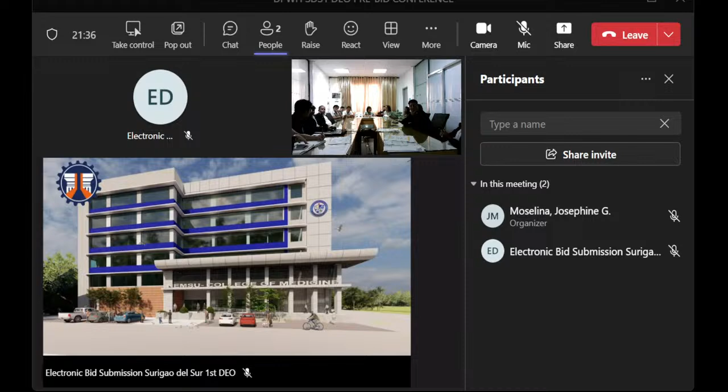Good morning, everyone, our BAC TWG, most especially to our representatives from the recipient of our first project presentation of the bid, our representatives from NEMSU, PMU. So today I'll be presenting our project entitled Construction of Northeastern Mindanao State University NEMSU Medical School, Tandag, Surigao del Sur, with a contract ID 24NH0097. So this is still our pre-bid conference.

So our source of fund for this project is under our General Appropriations Act of 2024, amounting up to 100 million. Project location with the following coordinates, and the scope of works for this project is construction of reinforced concrete pile foundation, tie beams, columns, floor beams, both conventional and post-tension, reinforced concrete slab and stairs up to our second floor, and plumbing works roughing installation, as well as our electrical works roughing installation.

So again, our appropriation is 100 million, but our ABC is 96,500,000, and our location is in Tandag, Surigao del Sur, within the vicinity of our school, Northeastern Mindanao State University in Rosario. Duration of this project is estimated to be about 360 calendar days, with the following description of works to be done with their percentages based on our program of works.

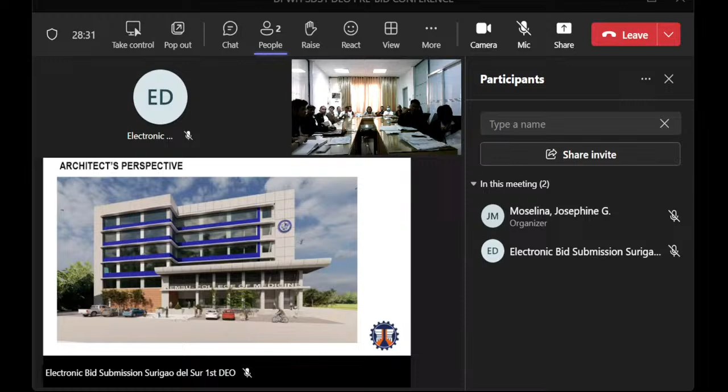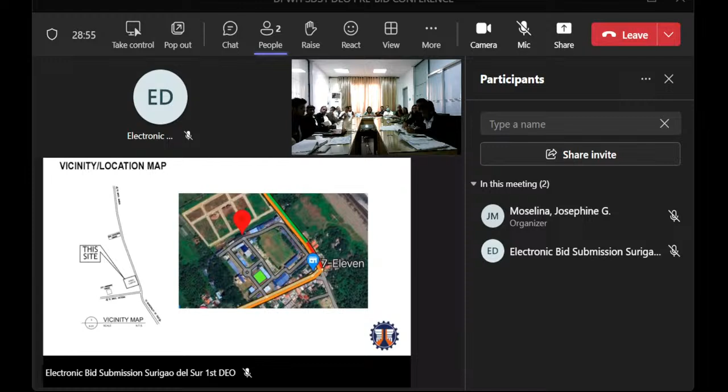For the vicinity or location map, it's located within the vicinity of our Northeastern Mindanao State University main campus in Rosario. As you can see, the green rectangle is the site. It is located adjacent to our administrative building, in front of the administrative building. So that's gate 3? Within gate 3, so near our gate 3 entrance.

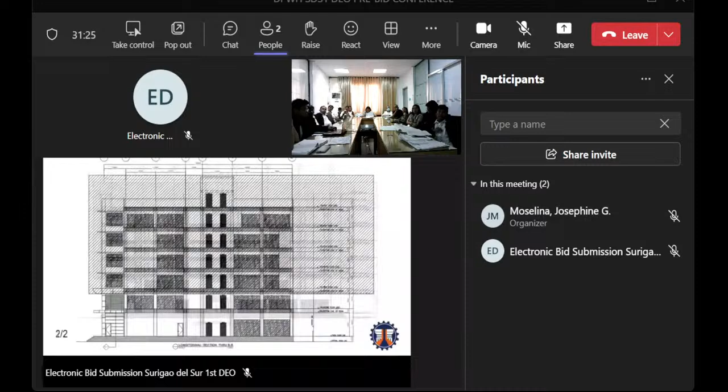So this is for our rear elevation. For our right side elevation. Then for our left side elevation. Our cross section through section A. Cross section through B.

The following details for our architectural plan for our stairs.

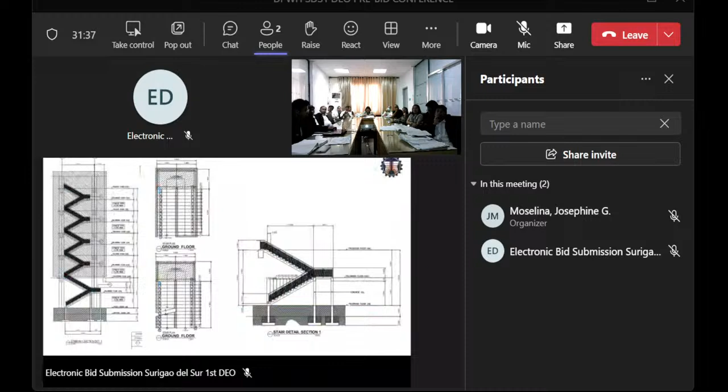And then let's now move on to our structural plan. Just to have an overview of our structural framing for this project, this is the STAAD model of our projected structural plan for our NEMSU Medical School.

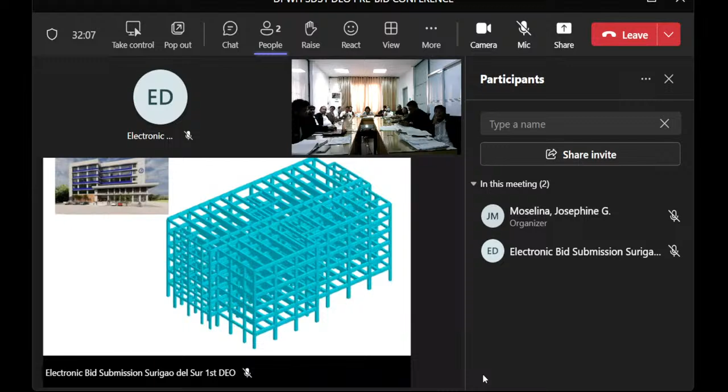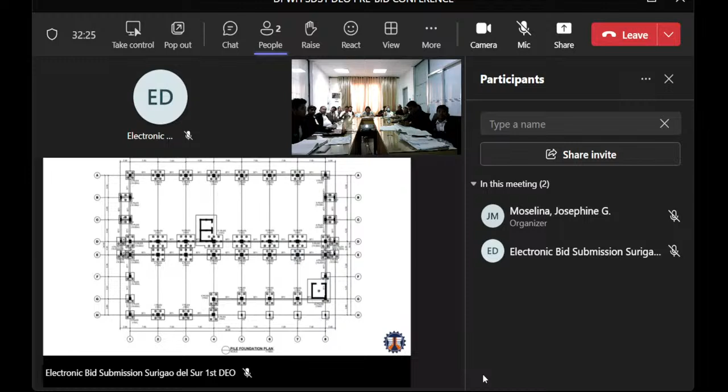For our pile foundation plan as shown, the following foundations have their breakdown on scheduling. We have 10 different types of foundation. Only one of those foundations does not involve pile driving, it's not load bearing, and the other foundations have their equivalent driven piles.

Just to have an overview of the pile length for this project, there are 2 types of piles, 15 meters and 10.5 meters. The pile cap details are also indicated in our plan.

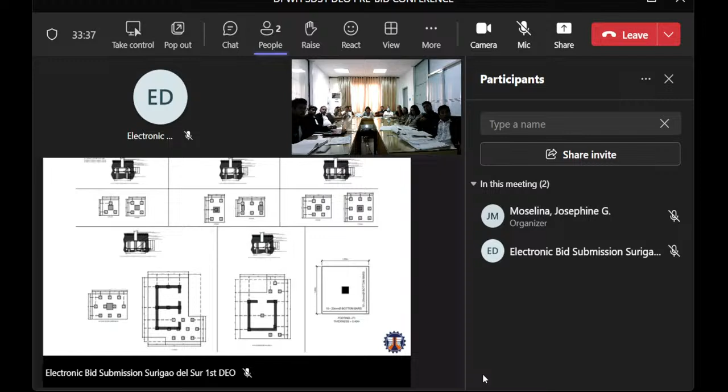We have a relatively large foundation, that is for our elevator shaft foundation. So you may refer also to the schedule of the plan.

Column schedules are also indicated in the plan, as well as our stair foundation details, stair details, and our reinforced concrete detailing for our elevator shaft.

And this is our second floor framing plan. Let me just highlight why our project has two types of beam, we have conventional and post-tension beams.

So these beams that are covered in our long span are considered to be post-tension or pre-stressed beams, as per our design, and the rest of the beams are conventional. Basically, the longer beams are long span, and NEMSU is aware of this design because in case of versatility with regards to the floor plan, as per our consultant, it can easily be revised.

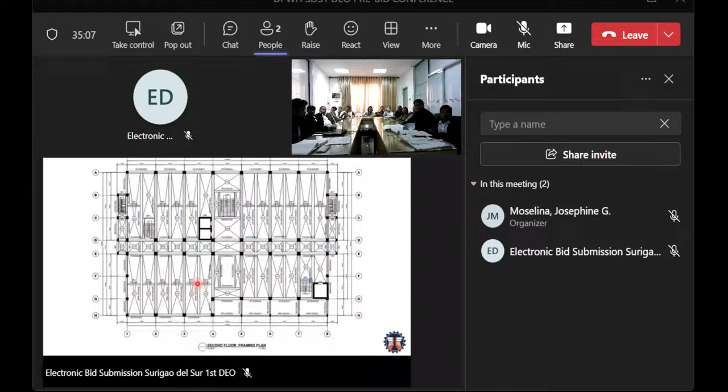We have the schedule for our conventional beams, and the same for our schedule for our post-tension beams with the following post-tensioning details. We're using 12 strands post-tensioning for our post-tension beams. The following slab details are presented as well, and for our slab we have incorporated our steel decking forms.

As shown in our typical details for steel, our design has also provided the detailing for our two-way slab.

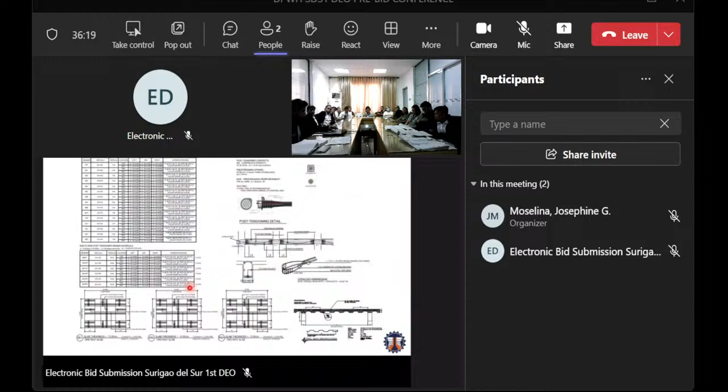That is all for our structural detailing. Moving on to our plumbing plans.

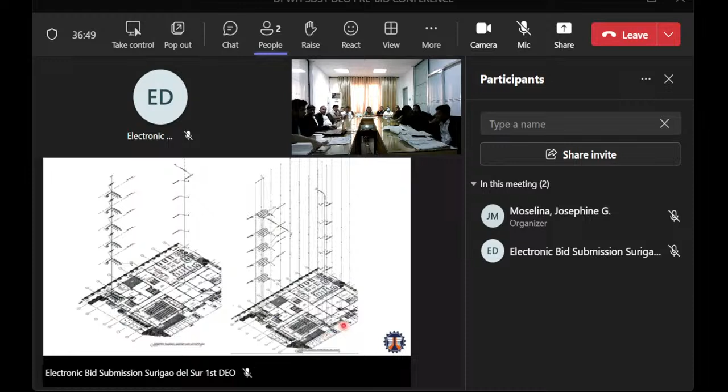This is the projected isometric view of our plumbing layout, for our sanitary line and for our storm drain line as well, mostly on the side of our comfort rooms. Same for our water lines, for our comfort rooms, faculty rooms, and as well as our laboratories.

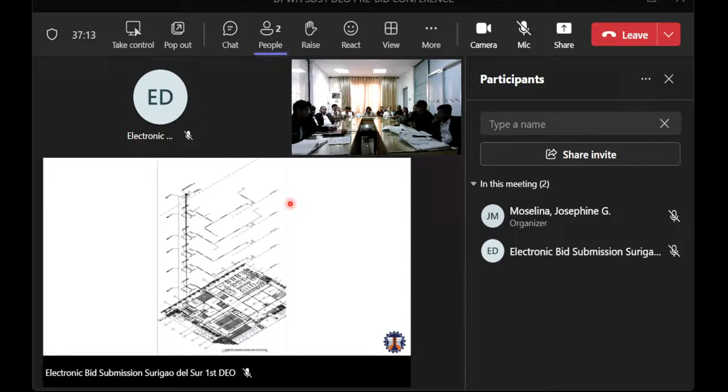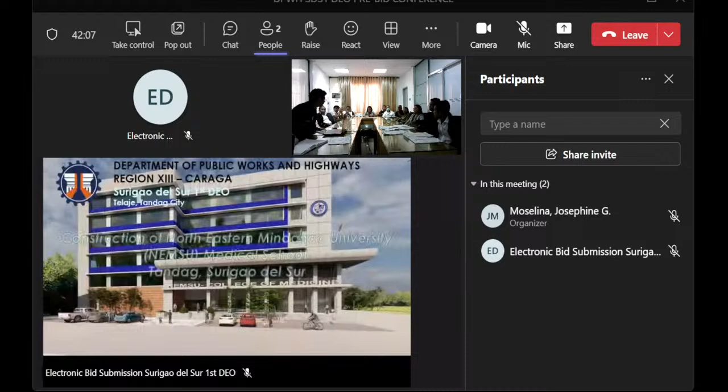Bidding for this will be on May 27.

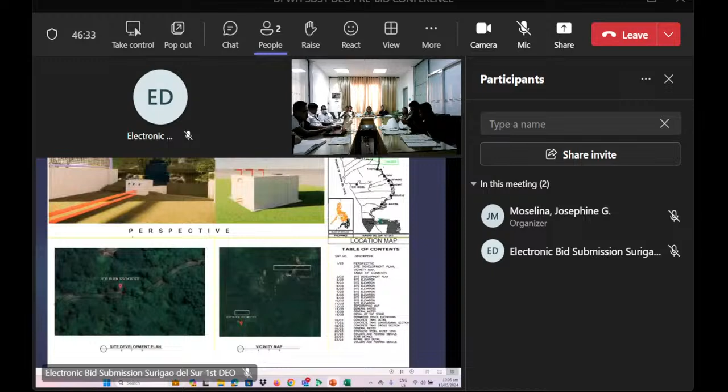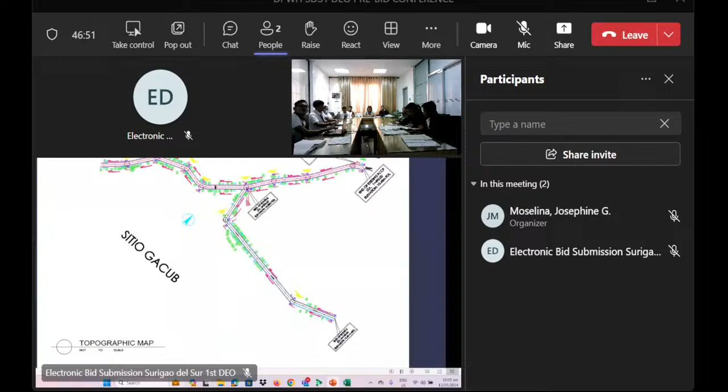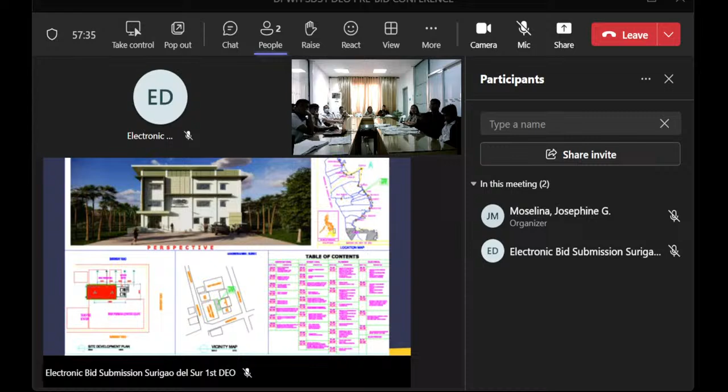For the architectural plan, site development plan, vicinity map, and respective details are shown. Ground floor plan.

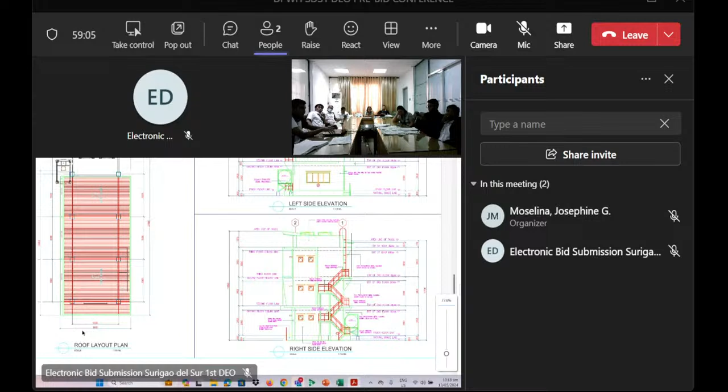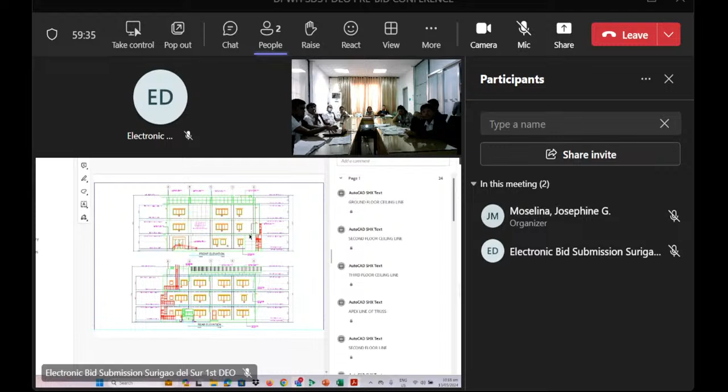Side elevation, right side elevation, front elevation, rear elevation.

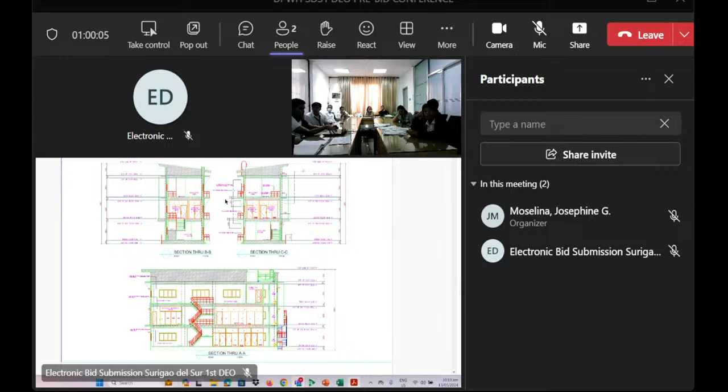Section thru AA. Section thru BB and section thru CC are shown.

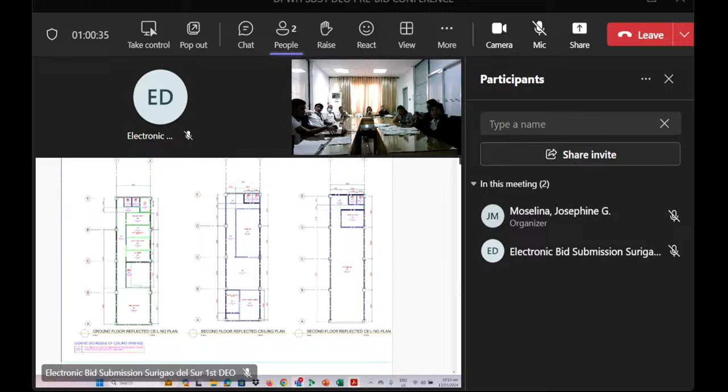On the ground floor, the ceiling plan; second floor and third floor ceiling plans are also shown.

Schedules of doors and windows are shown.

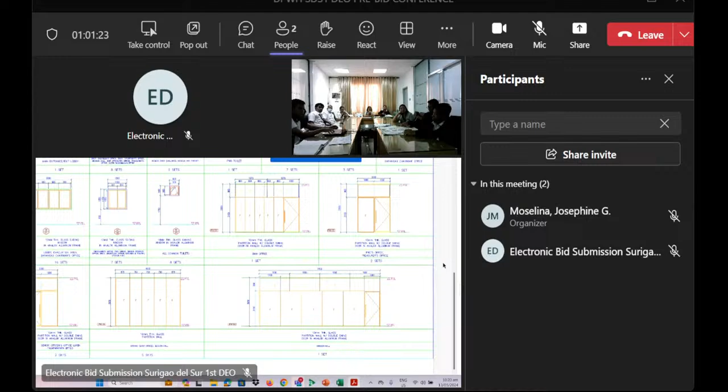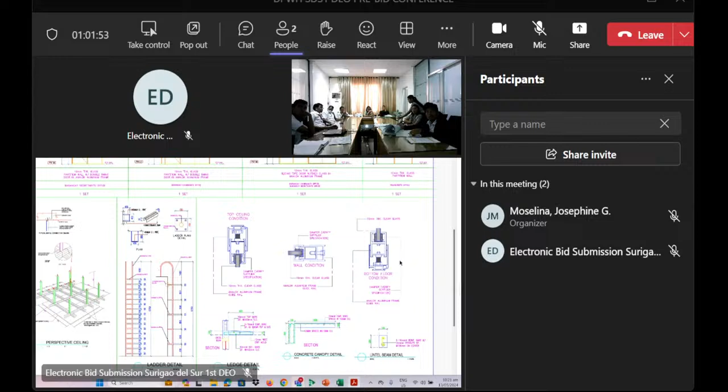For our blueprint plan and roof framing plan.

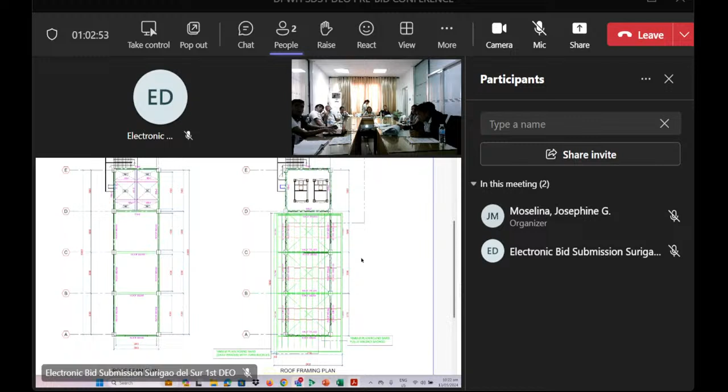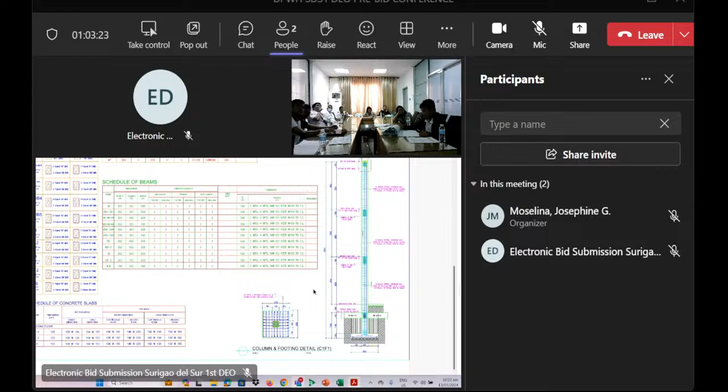Definition of concrete beams, schedule of concrete slabs, schedule of footings, schedule of beams, and column and footing details are shown.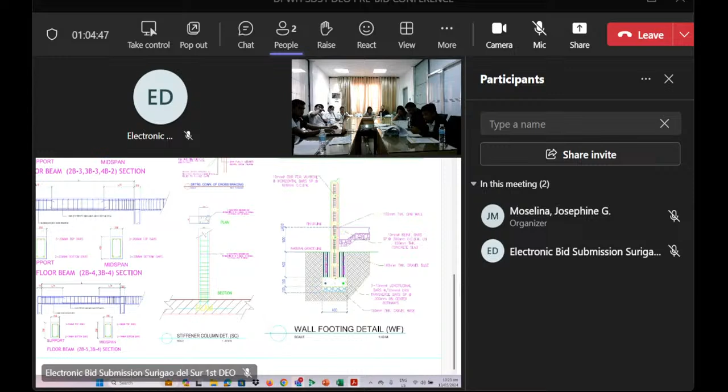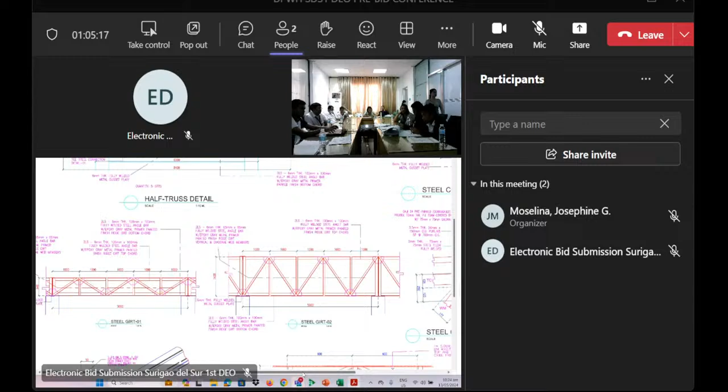Steel connection detail.

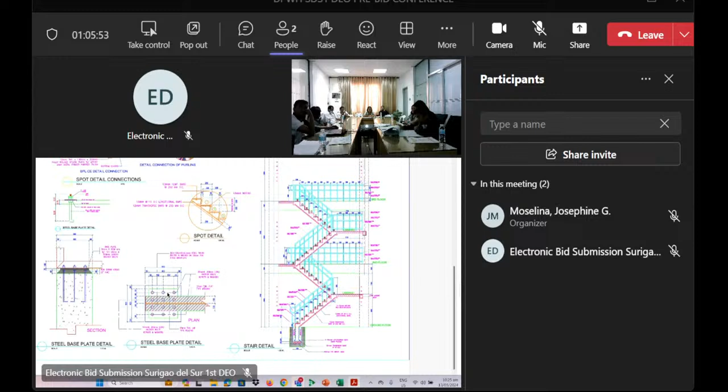This ventilation goes outside. And this is the stair detail for the exit.

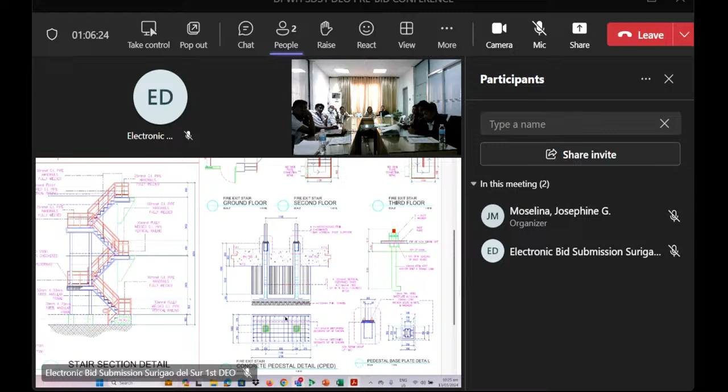Concrete pedestal for the exit, and this plate detail.

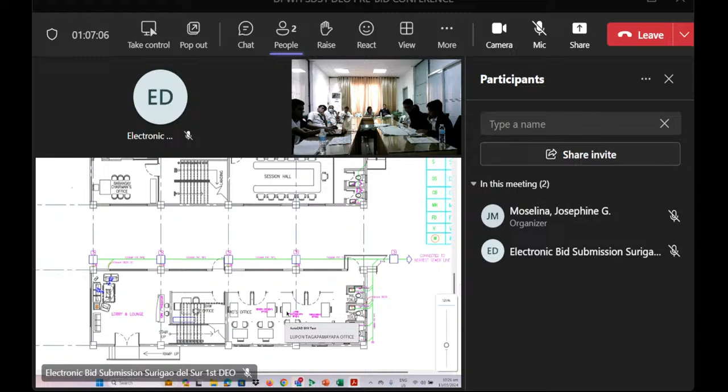For planning, storm drainage line shown for ground floor, then for the second floor and third floor.

Ground floor sanitary layout. Second floor sanitary layout. And third floor sanitary layout.

Ground floor cold water lines layout. Second floor cold water line layout. And third floor water line layout. And then for roof deck, this is the water tank.

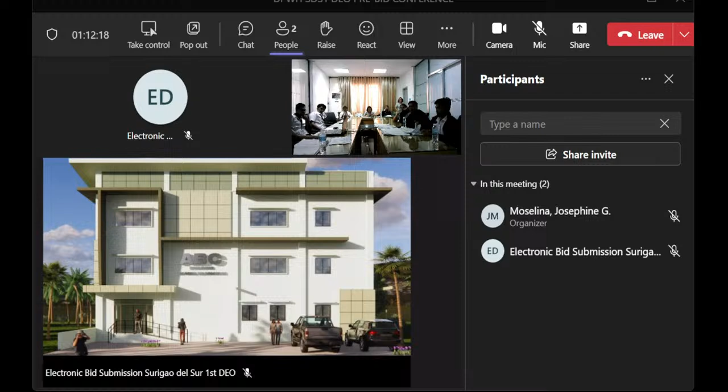Use grade 40 for RSB for columns. Use grade 60 for RSB for foundation. Add cross beams for support for the tank. Indicate splicings in plans. Provide bar bending diagram for beams.